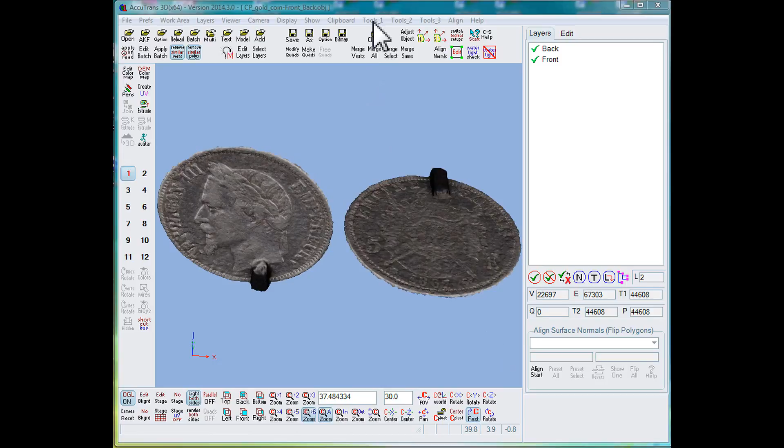For this tutorial, two 3D meshes representing the front and back sides of a gold coin will be extruded for 3D printing. A color 3D printer can be used because the sides of the coin are UV texture mapped. To enter the extrusion module, we use the Tools, Extrude Pseudo 2D Surface menu command.

Now, the layer selected for extrusion is the one that is the green color. Now I'm going to select the front view, and you can see we have no rotation about any of the axes. Extrusion takes place up and down, which is parallel to the z-axis. This layer is positioned properly for 3D extrusion. Up here we have the minimum and maximum values for the bounding box that surrounds the object.

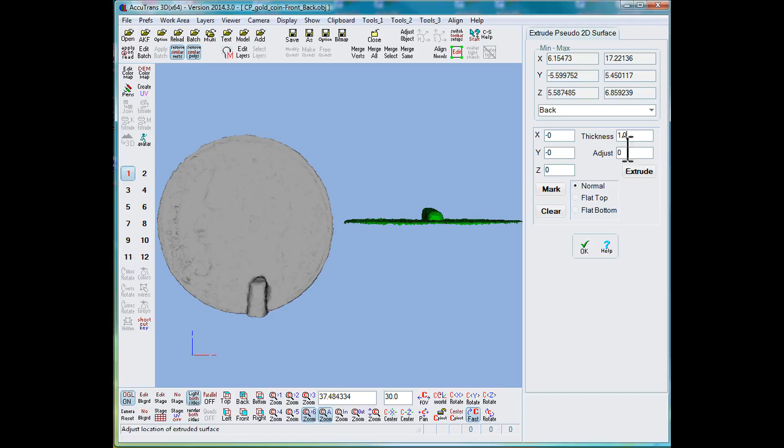Now we can enter a thickness here to extrude the object. This can be either a minus or a plus number, but in this case it doesn't matter which direction we're going. Press the extrude button and the object is extruded. If we zoom in, we can see that the bottom of the object looks quite irregular.

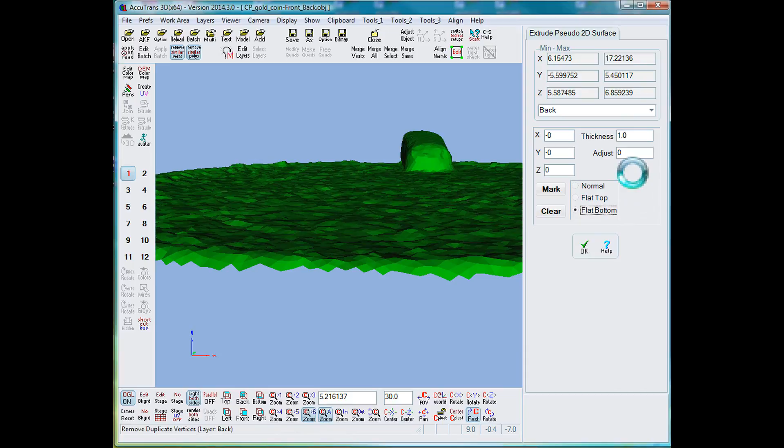I'll click the undo button, and we can see that it is quite ragged to begin with. The flatter you have the surface where you want to extrude, the better the extrusion if you just want to extrude a small amount. Now we will click flat bottom because we want a flat bottom on it, and I'll say extrude again. And now if we go up, we can see we've got a nice flat bottom on here.

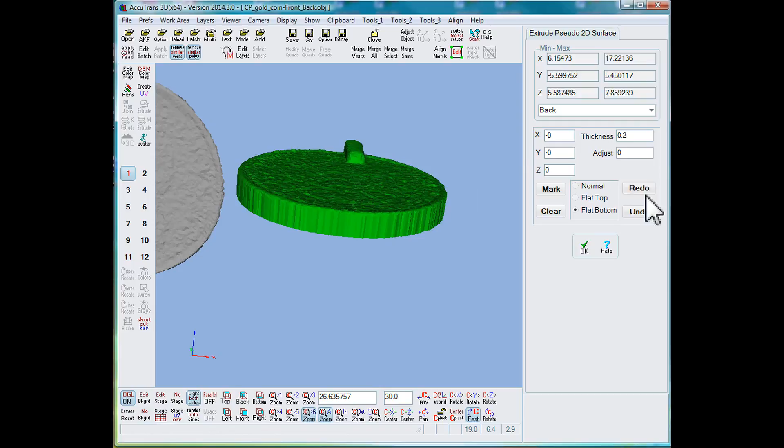But now this is way too thick for this coin, so I'll just change this over to a 0.2 thickness and click redo, and now we have a nice extruded surface. Now I'm going to right click on the other side of the coin to select it. It turns green, and click the front view.

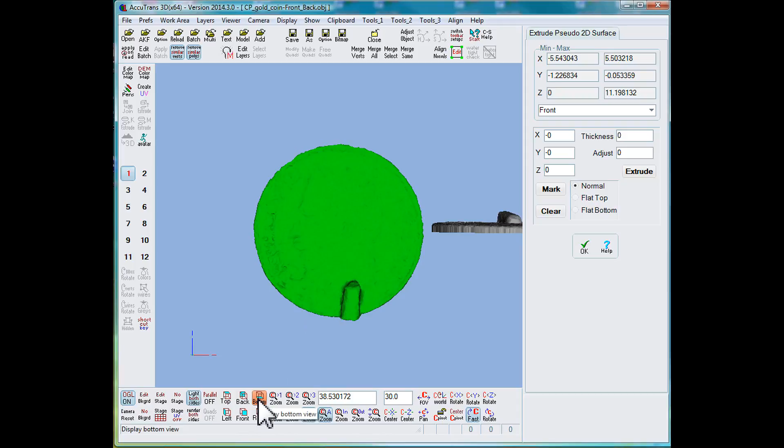Now we can see that this coin is sitting upright. I would actually have to extrude it in and out of the screen to have it extrude right, but the extruder won't work in that direction. It does the Z direction. You can see here that we're not rotated around any axis. I'll click the bottom button, and this is now positioned parallel to an XY plane, and you can see we have a minus 90 rotation.

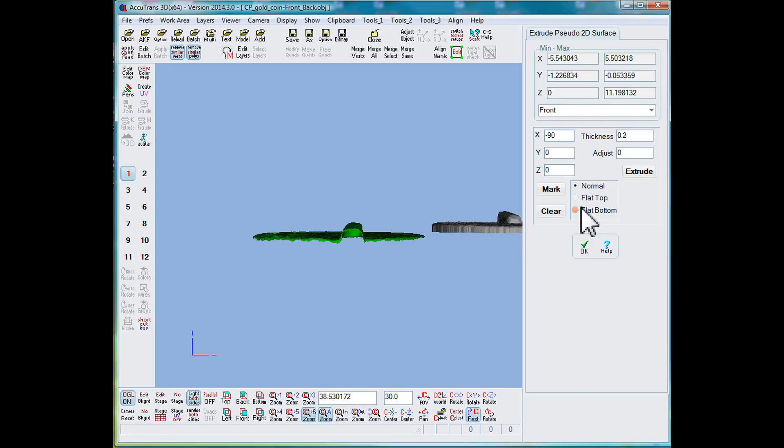And if I go up here and click the mark button, temporarily for the extrusion, the world axes are set to 0. The object takes up a new position, and you can see it's horizontal with our original one, and it's now ready for extrusion. So now I can put in the same 0.2 again, set flat bottom, do extrude, and we now have two objects that have been extruded.

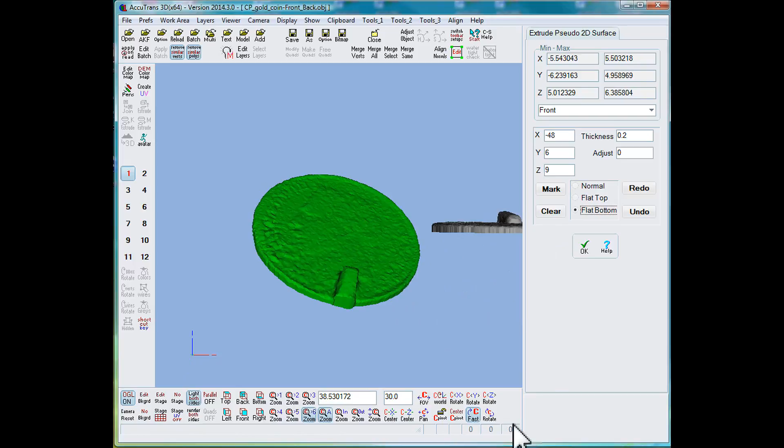If I click clear, you'll see that the object goes back to the position that it had. You can have any position and hit the mark button, and it will again zero out and take that as an extrusion. And we can just clear, and we come out. Now we're back to our original view, and we have two extruded objects. If I do a watertight check, it says the meshes are watertight.

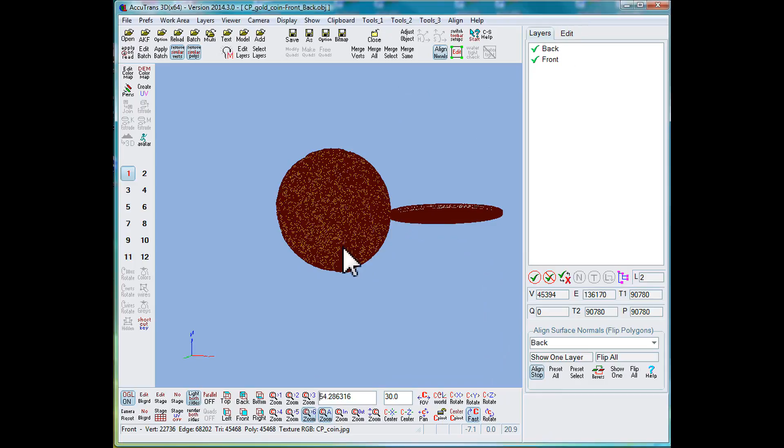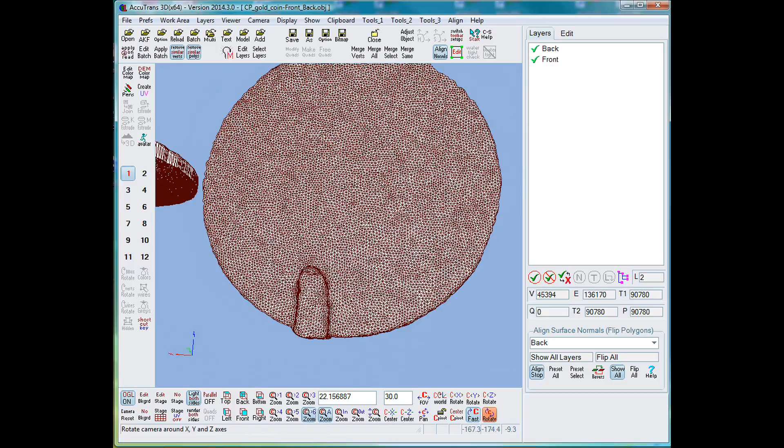If I go down here and click Align Start and come in, I'll click this button to show all, and you can see both objects are white, saying that the surface normals are pointing in the right direction for 3D printing. If I was worried that some place might not be positioned right, with this set to flip, I just click on any white triangle, and they all turn red, showing the normals are pointing in the opposite direction. Click a red one again, and it's back. Turn this module off, and we're ready to go.

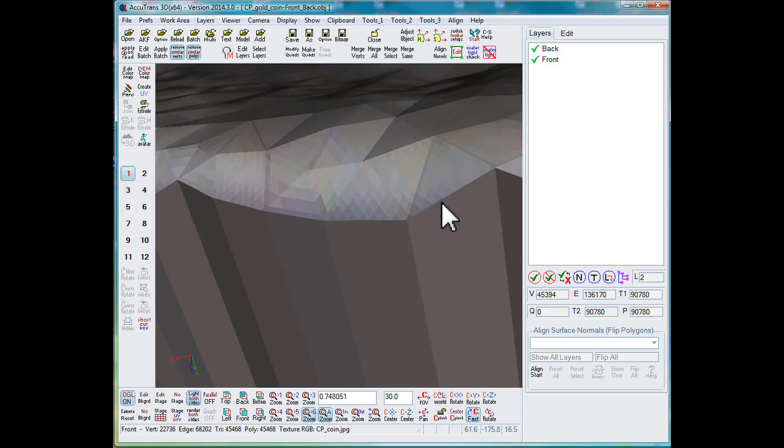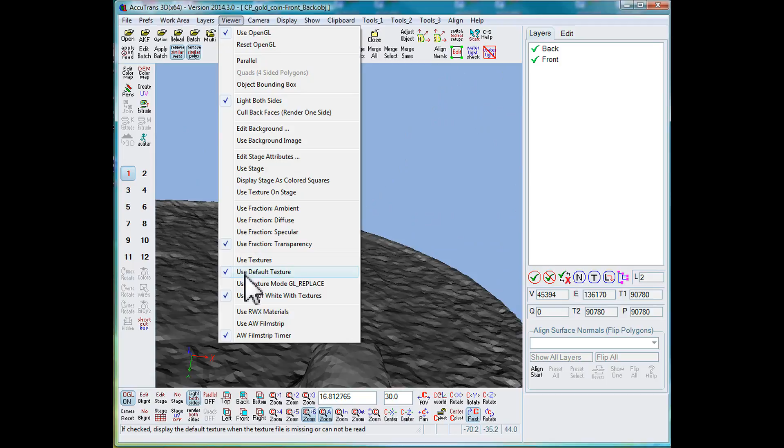Now, while we're zoomed in here, you can see the UV texture map on the object, and if I temporarily turn it off, we can see the bumps on one side and smooth on the other, just as we saw in the extrusion module. So now if you save these models out to, say, a VRML file, if that's what the color 3D printer accepts, you'll have two objects ready for color 3D printing. That's it for this tutorial.